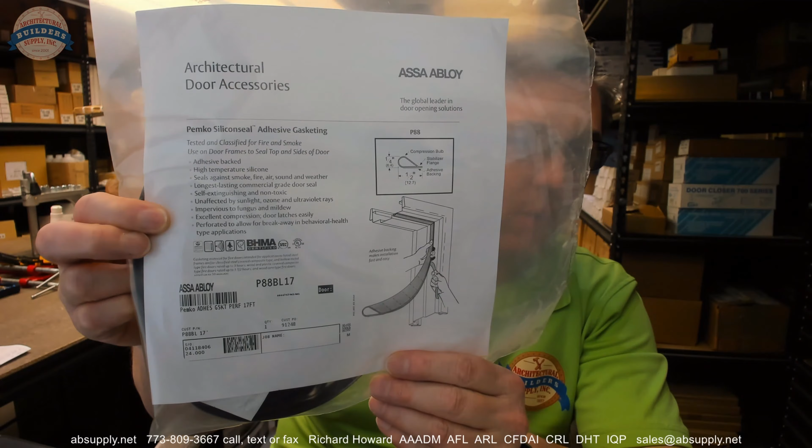Hello, my name is Rich Howard, owner of Architectural Builder Supply, and this video is to bring you a closer look at the Pemko number P88. This is a roll of black silicone seal, adhesive-backed silicone seal that is used on fire and smoke gasketed openings.

And it does have a special feature to it that makes it less common than the garden variety material, which means that it is perforated, and it's perforated so that it will not take very much effort to break it. Okay, so it's not that it's indistinguishable, but you really don't notice it when the material's installed.

You can see evidence of what they've done on the back adhesive tape. What they've done is they've poked these micro holes into it, really, so that if you pull on it, it's going to break pretty easily. I don't have any left over to demonstrate that, but the perforation, the concept of it breaking easy, is intended for ligature resistance, behavioral health, any sort of application where there could be the risk of someone using it to harm themselves or others, is why it's perforated.

And of course, this would be considered a sister product to the typical S88BL. They're both a silicone material, but they've got the letter P in lieu of S to indicate perforation. Okay, there is an image or a drawing down below showing where the factory perforates this material. So if you're interested to know where those locations are, that's provided. Okay.

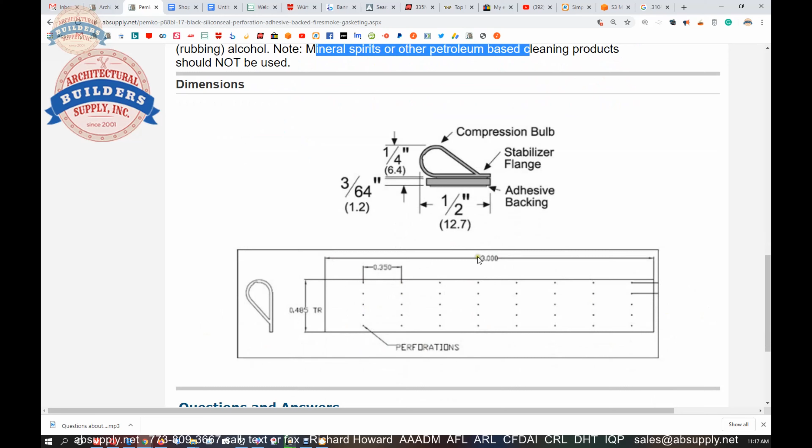Here's the explanation of what they were showing you in terms of where these perforations are. They're tiny, tiny puncture holes. No idea what size they are. They're all but indistinguishable, but they're on this sort of center to center all the way down. Now here are the supporting documentations right here. Let's first take a look at the cut sheet that's here.

Okay, so you'll take note of, didn't see tan listed as an available finish. And we will investigate whether or not tan is available. The roll lengths we've discussed. I'll check the tan while we're here talking on camera. We'll go over those dimensional properties, which are 1/4 by 1/2, down to a 1/16.

Take note of where they're asking that you install the material. It always goes on the rabbet in all of these instances. However, as an alternative, at the hinge and the strike, you can apply it to the face of the stop. I'll generally see, well, they're saying the hinge, strike, and header. You can apply it to the face of the stop.

If you were going to install this alternatively from how they're recommending it, I would probably always use the rabbet for the hinge, and then I would probably use the face of the stop for the header and the strike jamb, because it's just more conducive with how the door is moving. I don't want any sort of pressure this way on the material working to compromise the adhesive that might be in here. Okay, I don't want to push against that. I would rather just compress the face like it does normally on the hinge side.

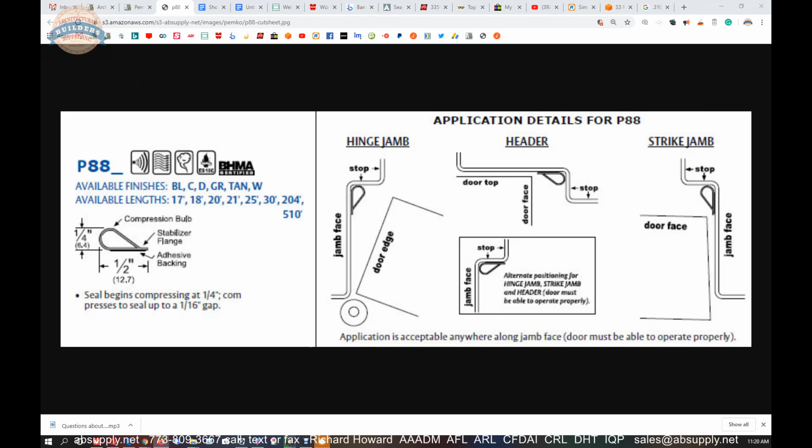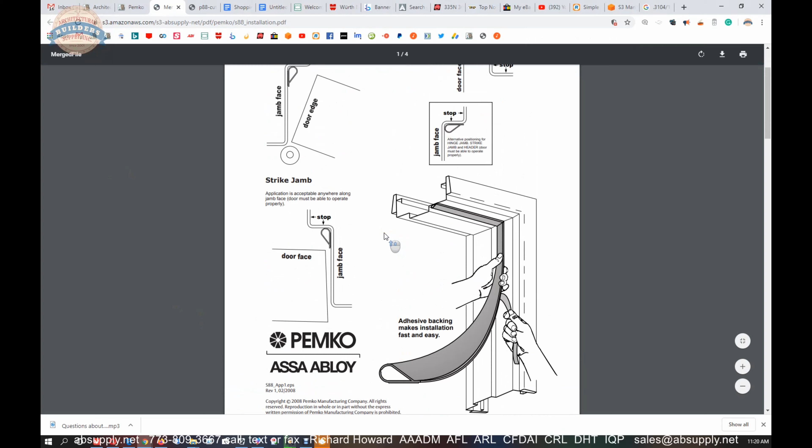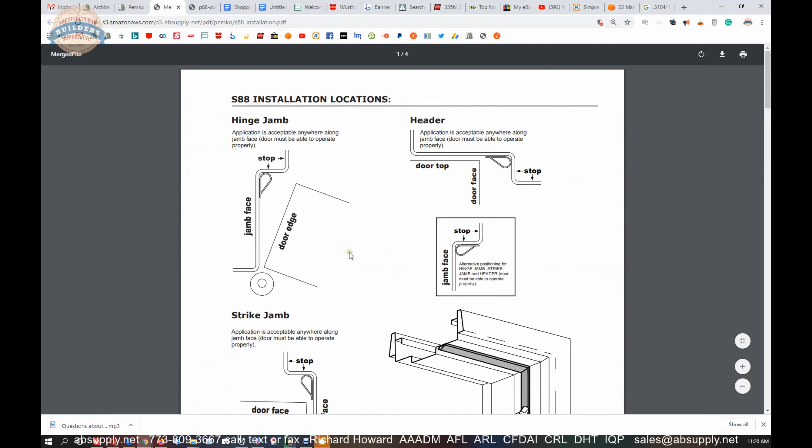So let's switch over to the installation instructions, and I've pulled up the factory's current price list. They do not list tan, so tan is not available. Installation instructions, and again, these are on the back of your packaging, showing you in detail where to apply the material. We talked about the alternative method of where to locate it. This is the S88 material, so the installation instructions will apply for either, perforated or non-perforated.

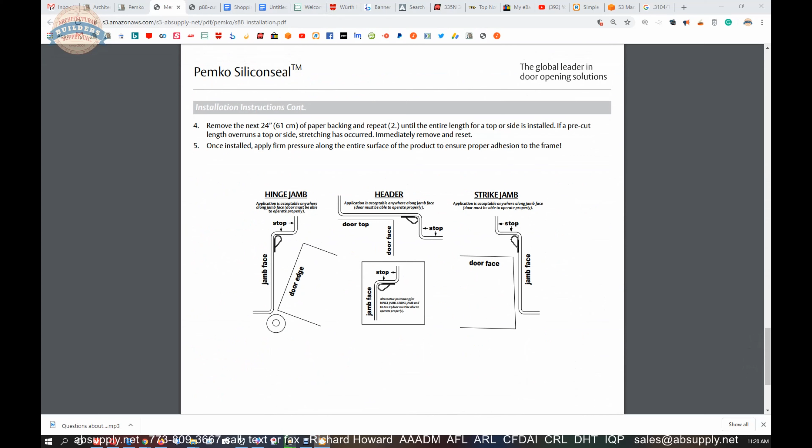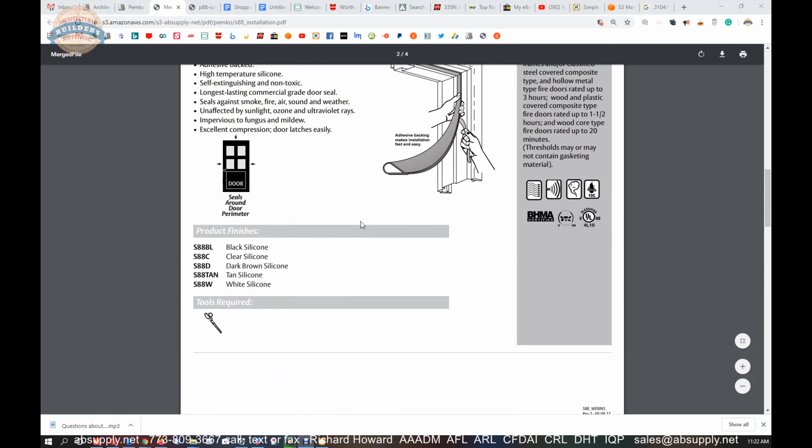And I've checked the Pemko website. There are no installation instructions for specifically the P88, but again, the installation will be the same. Pages 1 and 2 show you where to go about putting it. That's fine. Shows you the ratings on page 2 here. Acoustical energy, draft control, smoke control, fire control, UL10C control.

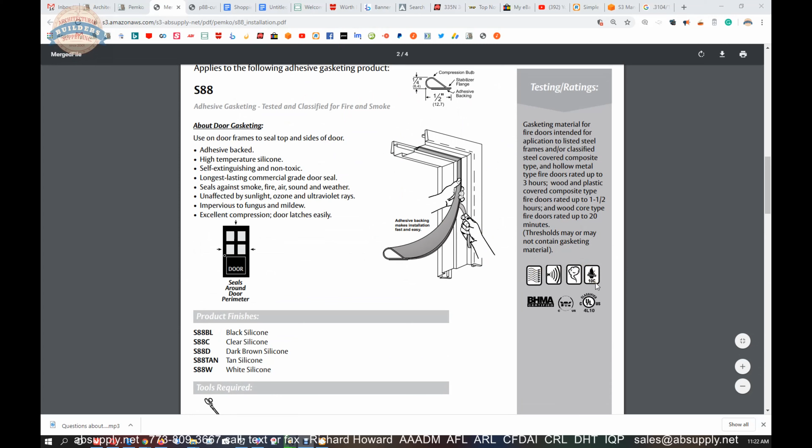The most important thing when it comes to installing this material is that your frame is utterly clean and thoroughly free of all dust and debris. If it's not, the installation is going to fail. If it's the first time you're doing this, thoroughly clean the frame, and once you think you've got it clean, I suggest you clean it one more time. After that, it's just kind of following instructions, but after you do the first one, you'll kind of realize what works and what doesn't work.

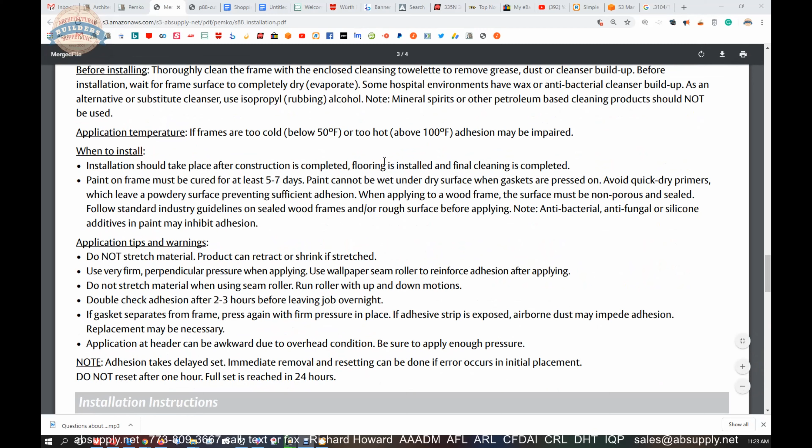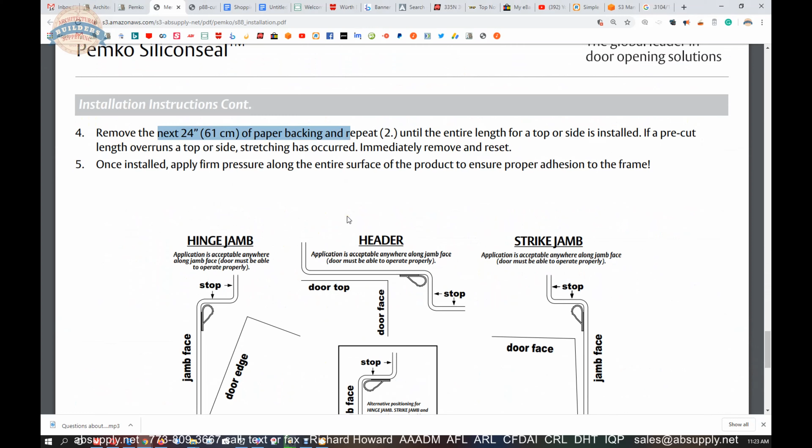The first time I installed this material, what I found was peeling away 24 inches of the paper backing at a time was too much, because I was tempted to stretch the material. And when you're stretching the material with this particular material, you could break it. You'll stretch it, apply it, then it will resume its natural point of elasticity and possibly break the adhesive that's there.

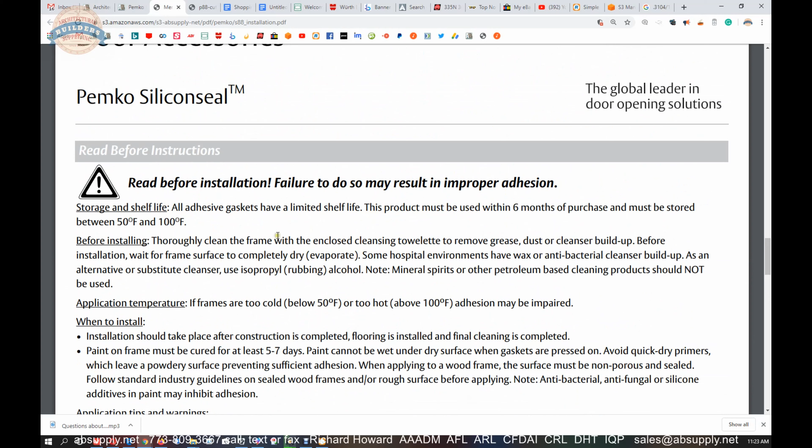So let's go over it. We talked about storing it. Before installing, thoroughly clean the frame with the enclosed cleansing towelette. We talked about cleaning it, same paragraph. Don't install it cooler than 50 or hotter than 100. Otherwise, the adhesive, as it's been engineered and designed, may not work.

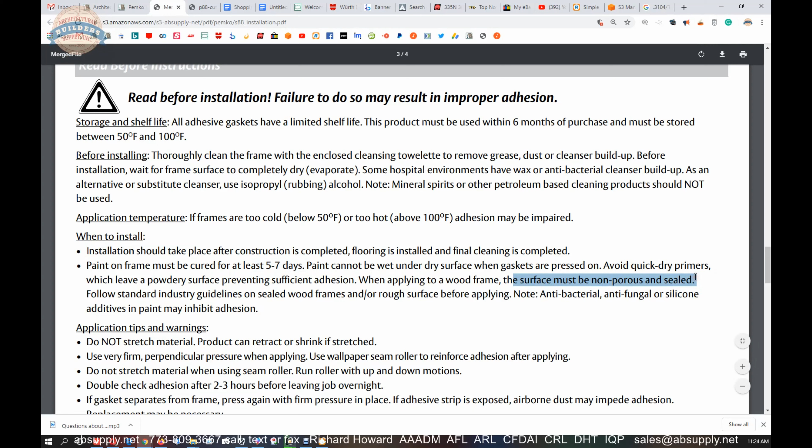When to install. Installation should take place after construction is completed, floors are in, and the final cleaning has been done. Paint on the frame must be cured for at least 5 to 7 days. Paint cannot be wet under the dry surface when gaskets are pressed on. Avoid quick dry primers, which leave a powdery surface, preventing sufficient adhesion. When applying to a wood frame, basically scuff it up a little bit. Clean that debris off. Give yourself some additional surface area to attach it to, and you should find success.

Don't stretch the material. The product will retract and shrink if it's stretched, breaking the adhesive. The first time I did one, that's what I did. And naturally, I came back an hour later, and it was detached in several places. And I was shocked, because I did a good job cleaning it. Well, I realized the difference between doing a good job and doing the correct job. Don't stretch the material when using a seam roller. That's certainly going to stretch it.

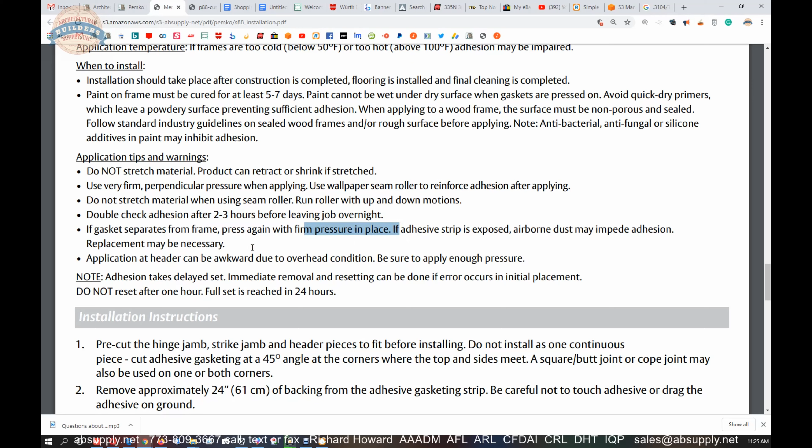Double check after 2 or 3 hours or before leaving the job for overnight. If the gasket separates on the frame, press it again with firm pressure in place. And you don't want the adhesive strip exposed because particulate will attach to it. Application at the header can be awkward, so be sure to not stretch it, and lots of firm pressure. Okay. Now, what they'll tell you here is to measure and cut the material to length so that when you install it, if you have a little bit left over, you know you've stretched it.

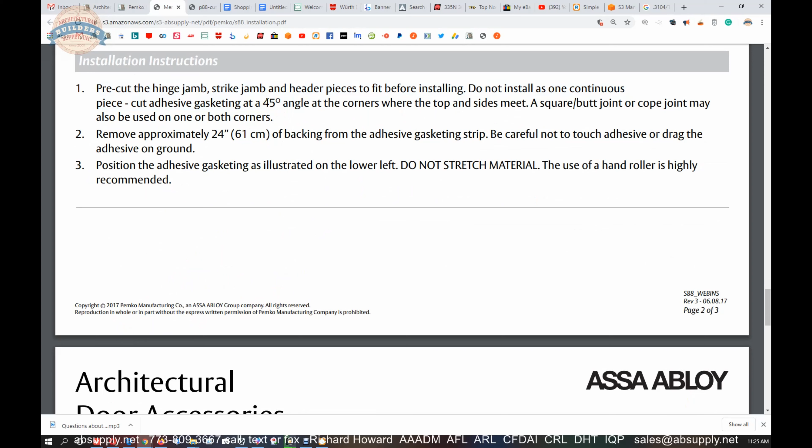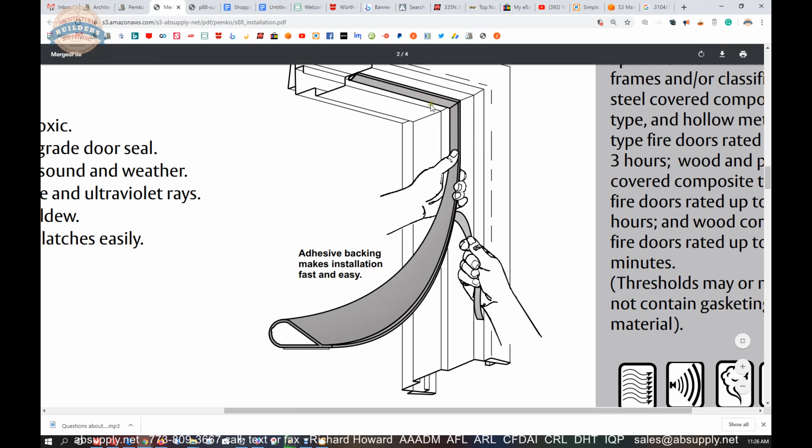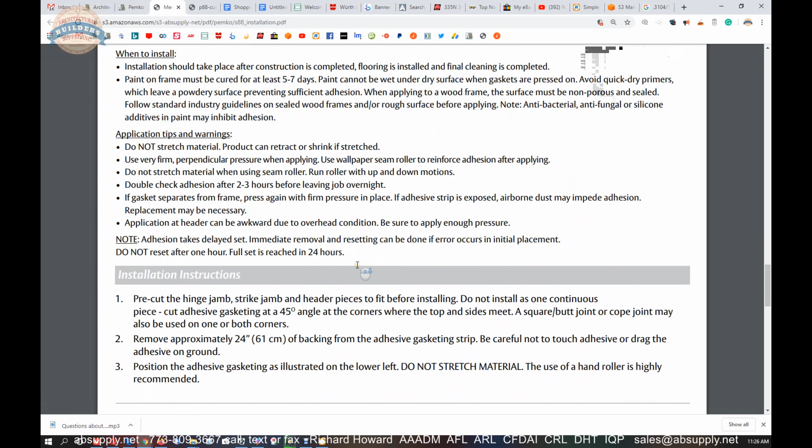Be mindful of how you're installing it. You might be able to do a better job by cutting the material at a 45-degree angle so that it will work very well on those inside corners. Okay, so if this is the hinge style, you would apply it to the rabbet, but then it might go to the face of the stop here, so you wouldn't be cutting it on a 45 at that point. You'd be butting it. But nonetheless, do the best job that you can with making that material come together as cleanly and as indetectably, I suppose, as possible.

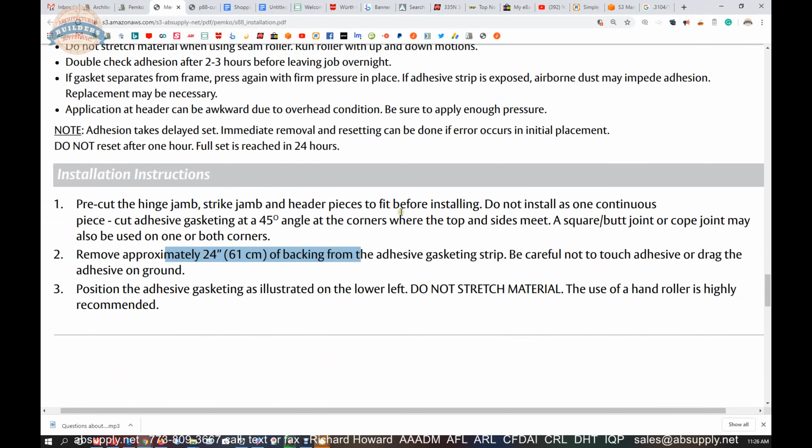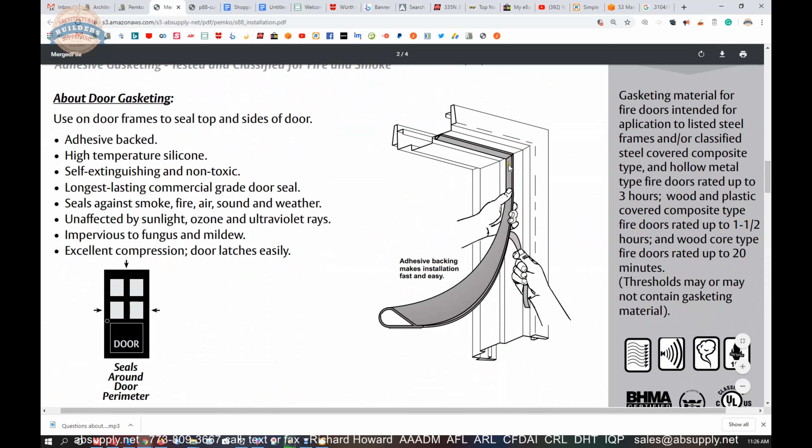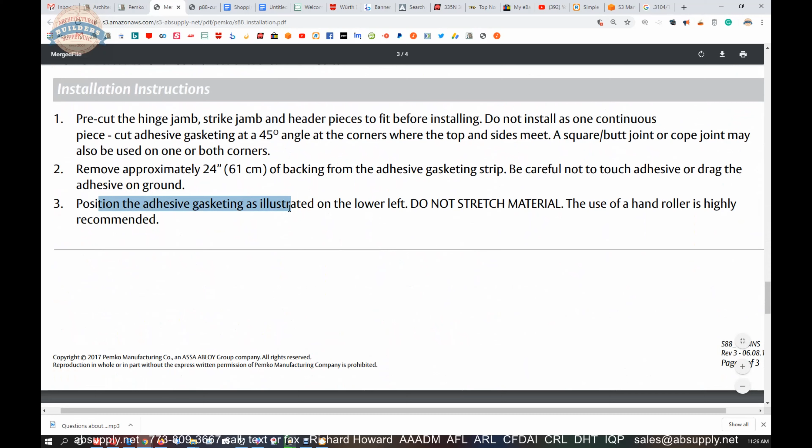Remove 24 inches of gasketing. I found closer to 12 inches worked better for me. The difficult thing with rushing and doing this is that your frame is just simply full of straight lines, so you'll see a wavy sort of installation here if you are applying it quickly and not patiently, because you'll see it literally curved and not installed very well. Position the gasketing as illustrated. Use a hand roller, highly recommended. I don't. I find that may stretch the material. Just lots of patient pressure.

Now, switching back to the camera view, that's our material there. And we can take a look and see that it's 1/2 inch. Yeah, 1/4 inch. When I compress that down, I don't really need my caliper to know that it will compress down really small. The advantage of that is an inspection, a fire door inspection, pulling away a small amount of that adhesive is going, depending on the door composition,

let's say it's a wood door, steel frame, the maximum gap that you can have between the strike jamb and the door and the hinge jamb and the door is 1/8 of an inch. You can't have any more than that. So you really don't have any room to get smoke and draft control gasketing on the rabbet. And that makes this material really nice because it will compress down so small. That adhesive, while it's certainly quite strong, keep in mind, you're going to want that frame to be super clean.

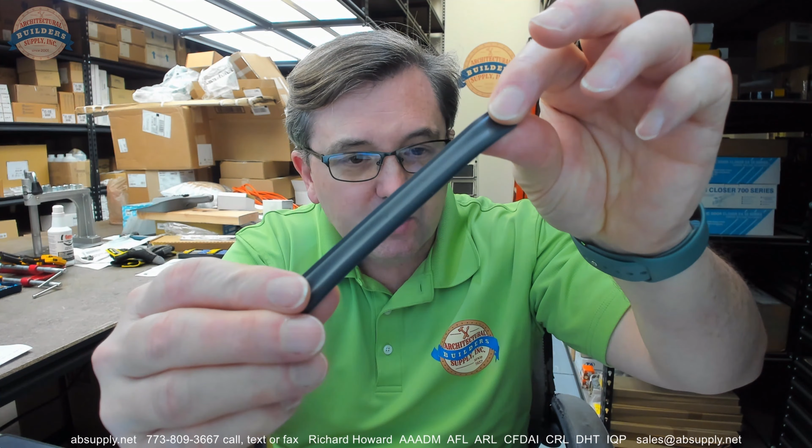Now, what does my caliper say when we do compress it? Yeah, you'll certainly get it below 50 thousandths. About 45 thousandths when I just put it on there and just rotate my caliper. About 45 thousandths, so less than 1/16 of an inch. Yeah, all but indetectable. You can kind of see little dots there, and those are the perforations.

Again, hospital applications, certainly behavioral health, any area where you need that material to fail by design, because no one's ever going to touch it or pull on it unless you meant to pull it off, and it will probably break apart as you're pulling it off the adhesive anyway, would be my guess. I've never removed it, but I have in some other video pulled the perforated ligature-resistant material from Pemko, and I was quite surprised how easily it came apart. Not that it will ever fall apart on you. It doesn't take much to pull it apart, that's for sure.